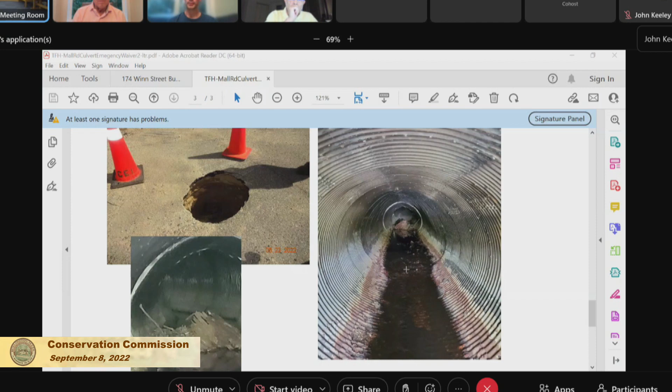What we'll have to do is bypass the Long Meadow Brook. Up until this point it was pretty dry, but with this last bit of rain we definitely have water flowing through it. The bypass is the same as what we're doing with the stream cleaning: we'll sandbag the stream and put a pump in it, then pump around that culvert. We were lucky that there's a catch basin right there, a 12-inch pipe that goes across Mall Road, parallel to the 84-inch pipe, so it discharges at the exact same location. If there's any sort of problem with sediment, we can use dirt bags, wattles, or hay bales to capture that sediment. So that's the game plan.

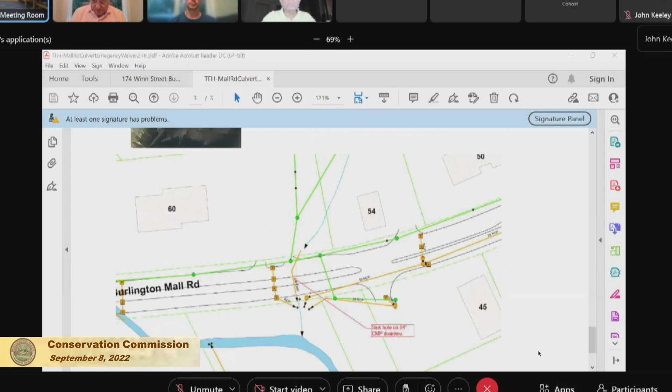All right, Eileen, or John, do you have any comments on this? So the only real concern is the dewatering.

Obviously they need to take care not to suck up a lot of sediment and discharge it into the stream. So I was thinking one of the things we could condition as part of this is that the catch basin they're pumping into be cleaned beforehand and after the project is done. Clean out the catch basin. I don't know, was there any other draft conditions that I put in?

That's just a suggestion, it's up to you, but.

No, you said catch basins and culverts used for bypassing stream flows shall be cleaned before and after culvert repair, and filter bags shall be used to filter stream flows prior to discharge to catch basins. So just the filter bags, is that the only condition you're proposing for this? Right, yes.

So there's no document in front of us? Well, there is, but I can share it. That's all right, I heard what - oh, it's an emergency certification, so it's just a couple conditions, no document. I can share it, but it's a very simple document. Let me just, yep, that's fine, and it's gonna pop up.

Those two things that are hard to read from over there are the two special conditions. So that's what the cert just looks like. Okay, good. Let's see if anyone has any comments.

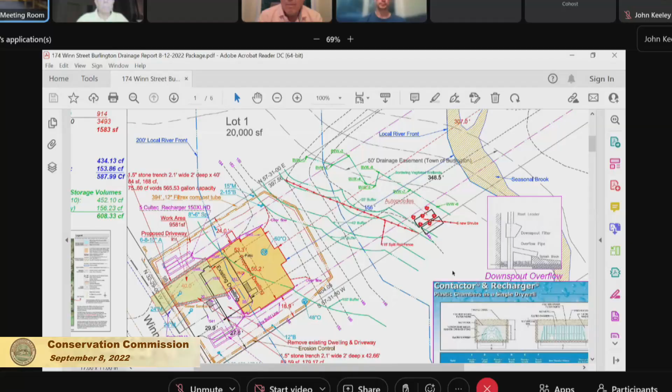Okay, let's go around and see if there's any last questions, and then we have some draft documents for a negative conditional determination. Let's go with Dawn.

Dawn, any further comment on this one? See this, Mary? I did, thank you. No further comment. All right, Indra. No, I'm happy that they were able to move the house towards the street, 10 feet. Right, that's good, exactly. All right, how about Ed? Nothing to add. All right, how about Kent? Bill, Nope, they addressed everything we asked. Much appreciated.

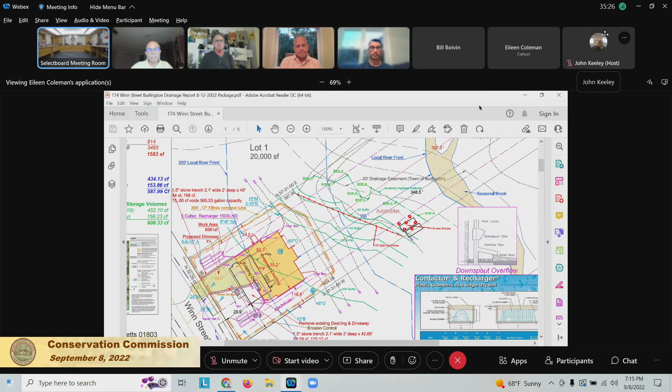I'm just wondering about something. In pulling the house 10 feet forward, that leaves some distance of flat area before that slope starts. Do you happen to know how much that area is, like when you step out the door, it's flat, and then some distance off it goes down the slope? No, I do not have an exact setback for that.

I do believe that Mr. Ferrante is proposing a walkout basement on this yard, which will accommodate some of that drop because you won't have foundation wall showing. That's fine, okay. I understand your concern about that, no, I was more wondering how much of a flat backyard he has before the slope, that's all. But it's not necessary to know that in order to approve this.

Yeah, I don't have an answer for that. The fact that he pulled it 10 feet, I'm more than happy with. Yeah, that also reduces the length of the driveway. I mean, there are several positive features when you make that move. Right, good, okay, thank you.

Is there anyone in the audience for 174 Winn Street? Anybody has a comment before we move forward on it? Okay, the record should show no one, no abutters or other citizens have a comment on it.

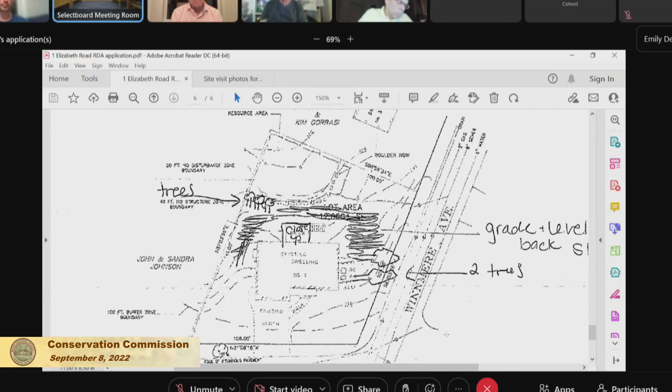So, Mr. Hamel, do you understand what our administrator is saying? So looking for a little more detail on what exactly we're proposing as far as the space that we are leveling and how much we're, I guess, bringing in to fill that space. Is that right? Yes. So the actual dimensions of the area...

...and showing where material is being removed and where material is being added. It's not clear if you're cutting into that slope or if you're bringing in fill. So all of that should go on some sort of a better sketch. Okay. Yeah, you had mentioned a retaining wall of some sort. That should be shown on the plan with some description of what it is and how tall it is, et cetera. Okay.

Okay, so, all right, let's see if any of the commissioners have other questions. How about Dawn? Anything on this one?

Nothing more than what was already discussed. Same thing, only one comment I have, just what John mentioned already. The tree which is in good shape, I don't think that should be removed. That's the only comment I have.

The only thing I was concerned about, after we left, I looked back at the property on the other side of the fence on the left side of the house, where those 3 trees are questionable to come out. If anything's to be leveled there, it'd be interesting to see the leveling. What does it do up against that fence? Or is that pretty much the same level on either side of the fence? I'm trying to wonder what the leveling would do. So what's being requested would probably answer that.

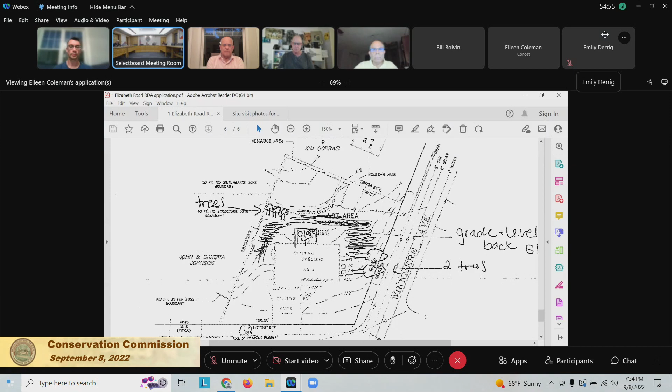Bill, have anything else? The only other thing was beyond the fence, there was some dumping, and some looked like maybe construction material, some panels or whatever. We certainly don't want dumping to encroach onto the regulated area at all, especially non-biologic material, construction material, stuff like that — should certainly get that removed.

Well, those piles, I think, are well within the buffer zone, right? I think so. I think they are. Buffer zone? Oh yeah, yeah, they were. Okay, yeah, the back porch is in the 40-foot no-build, I think, right? Okay.

All right, I have 2 questions, both for John, or Eileen. If the removal of the 3 trees on the left-hand side — is there anything about those trees, would the wetland, which is what we're trying to protect, have sufficient shade, or is it a non-issue if those trees are removed? No, there's a lot of trees on the other side of the fence between the fence and the wetland. Okay, so it's a non-issue for the protection of the wetlands.

Right, okay, that's good. And the other question I had — you said they're Norway maples, so those can be removed. Is there something about Norway maples, that they're not good or something? Right, they're on the state prohibited plant list. You can't buy Norway maples any longer. Why is that? They're very invasive, so they spread. Right, unintended spread. Right. Oh okay, well that explains why you made the comment the way you did, by non-native. Okay, all right.

Unfortunately, this site is rather narrow compared to what we've typically worked on. So we tweaked the design a little bit, and in doing so, we actually rotated the garage. We have a two-car garage so that it is on the rear of the building and has a side access from the driveway. You can see on the plan there that section that's sticking out in the back of the house. That rear of the garage is about 169 feet off the property line and about 184 feet to the edge of the brook.

So that's where we're actually violating the 200-foot setback. We've also, since this is a larger structure than the other houses in the neighborhood, and also desire to give a larger front lawn, we actually pushed the house back 20 feet from where the original structure is located. So that is another design decision we made for this house. On the left-hand side, we have the driveway and then a little bit of a turnaround area there. So that's kind of an overview of where we ended up with this one. So we're seeking relief to be in that 200-foot setback a bit.

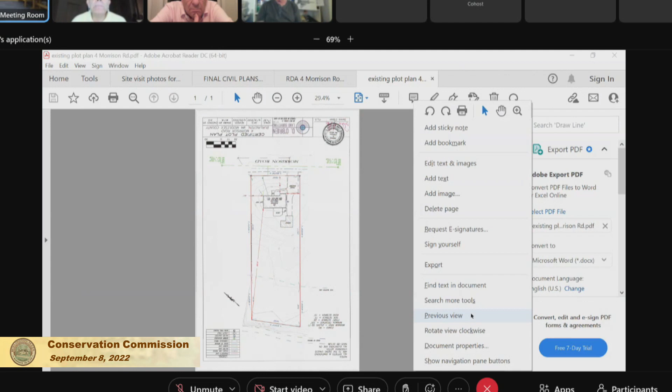Sure. Okay, good. Very good presentation. Thanks. Thank you. John or Eileen, would you like to give us a rundown of the resource area and any comments you have or concerns?

Okay, well, I guess it'll be me. So the confusion there was over versions of the drawings that I saw, because it wasn't clear at some points whether they were inside or outside the 200-foot buffer. So just to show you, this is the existing house as it is. There's a garage kind of far back, and the house is definitely more than 200 feet from the back of the lot, but the garage is a bit closer.

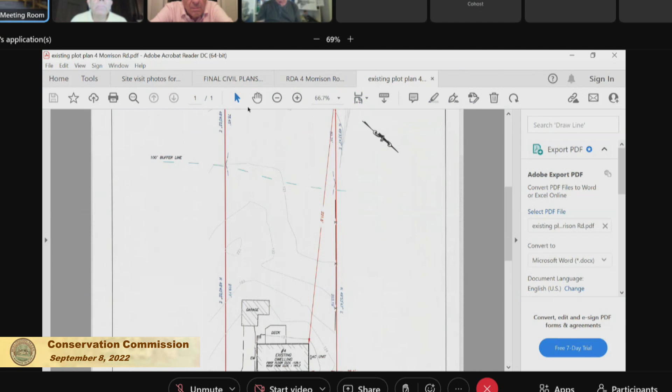Oh, sorry, I've just accidentally gone onto, give me 1 second. So now the back of the house, which I think is where the new garage is going to be, is 180 something feet from this brook. It's off their property. We did take a look yesterday. I didn't see any wetlands on the back of the site. So we are dealing entirely with

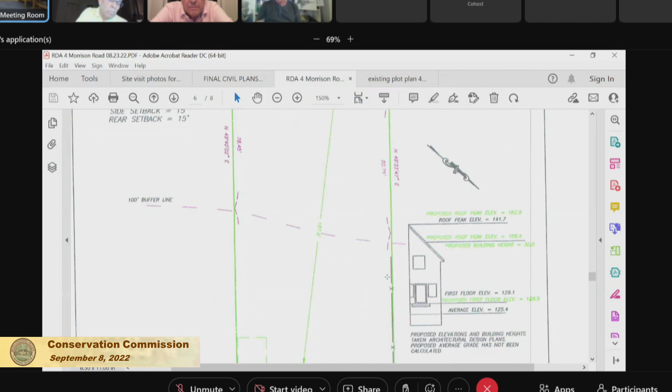riverfront under our bylaw. So there was a little bit more confusion as to whether, I don't think they understood that we usually, with a full tear down and rebuild, we do usually regulate that under the stormwater bylaw as well. So we ask that we know what it is that they're doing for stormwater, because otherwise it would go through us with a stormwater permit anyway.

So they had also produced these civil plans. Now, I don't think they wanted me to show it just because the distances are wrong, but this one, just so you know, shows how they were proposing - I'm not sure if this is final now because there was some confusion over this - but they were proposing to put in an infiltrator, which was going to take at least some of the runoff from the roof, and to put in a stone trench with a perforated pipe along the driveway, with the driveway pitched towards that pipe, so that all of the water would be infiltrated on site.

So there were just some questions today, some back and forth, as to whether it was over the 10,000 square feet and as to whether it's actually inside or outside the buffer zone. So that was the confusion. So it is riverfront.

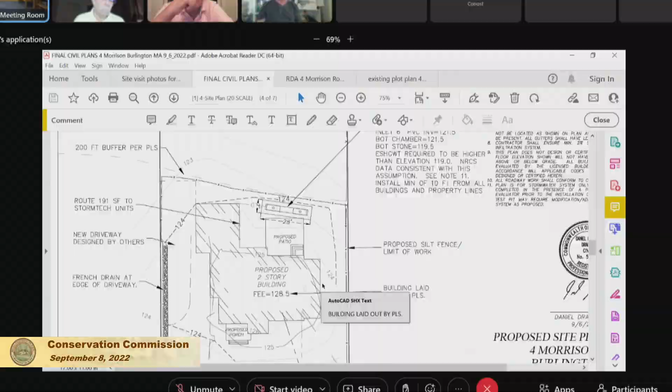So how many feet closer into the riverfront is this, to clarify for the commission? Closer than the existing? Well, it's actually pretty similar to the existing. I think it's maybe a few feet.

About 185 feet from the edge of the brook with the new house. As for the old structure, the back of the garage is right here. I don't know if we have an exact garage dimension - the red dimension would show the house, but maybe it's 10 feet or something. It's not a lot, but it brought them closer.

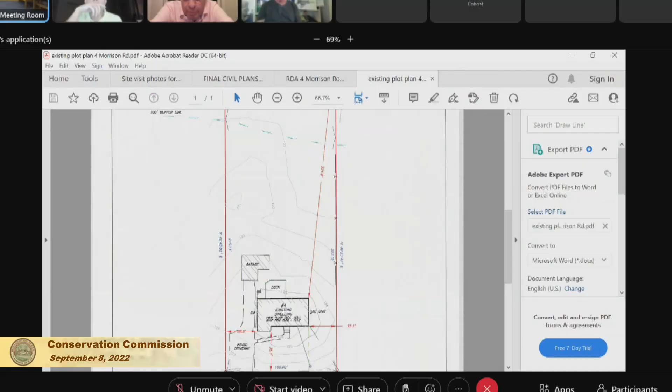We were considering 15, all the setbacks when we were designing this, so we were asking for a small release.

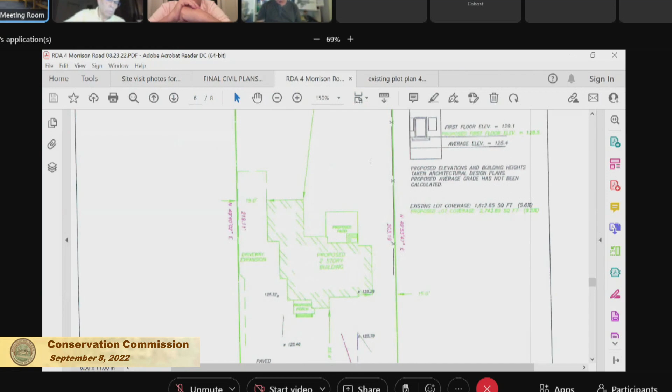Let's go to the commission and see if they have questions or just comments. Don? I don't have any further comments. Indra? No, I don't have anything at this point.

That's fine. How about Ed? Ed, are you muted by any chance? Sorry about that, I was trying to find something but it's not what I was thinking. So no, nothing to add.

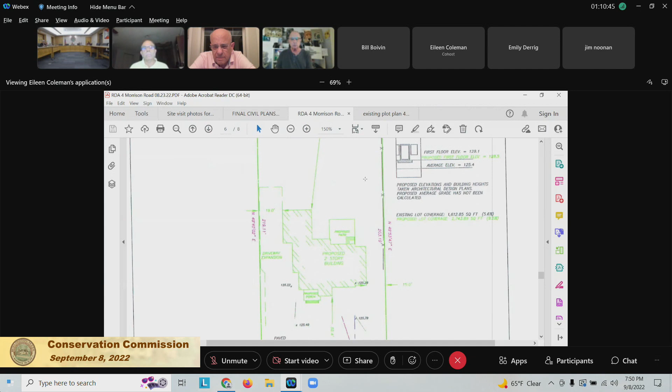All right, Kent? We do need the drainage specifics, not only the infiltration, but what's going into it and how you're handling driveway runoff. Is it pitching to a trench? We don't want the driveway running off into the street, so we're going to need that information for the next meeting.

Our intent is to meet the guidelines for the building, so we'll show that we have a civil engineer that will draw that up.

I don't believe it was required for this meeting, correct? Well, I did say it to you guys in an email yesterday, to be prepared to explain how the stormwater was going to be managed, because we do regulate it under - the civil drawings you have, that will be the same plan. The only difference was his dimension was off.

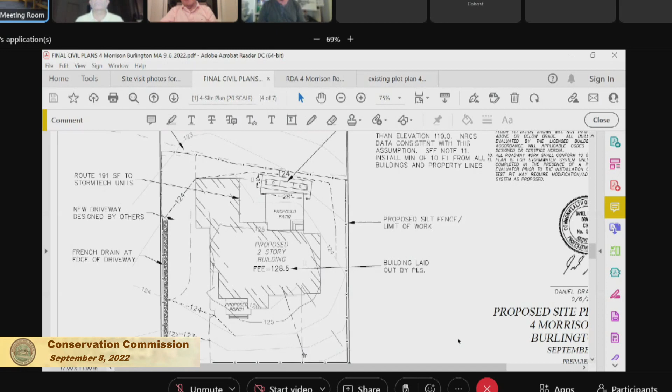So do we have a copy of that - French drain and a stone trench here. How is the runoff from the driveway being handled? Could one of you go over how the stormwater off the house and off the driveway is being handled? Now I see it, okay, I didn't see that drawing before - there's a grid. Go up there and point if you want.

You have the pump system, that's where all the gutter leaders would be pointed to collect the water, and this is for the driveway. The only thing we're pointing out, so maybe it's alarming you, is that the 200-foot setback drawn here is in the wrong location. Yeah, no, I got that, we understand. But the way you're handling the stormwater is exactly the same - correct, it has nothing to do with the setback.

Okay Bill, do you have more questions? I'll just clarify, what's going into the StormTech - is it the house and the garage runoff? You say garage, you mean the structure? Yeah, the roof.

It's actually only part of it, which is something I should have - what we're pointing out here too is the driveway runoff. In the drainage calcs that you sent, it looked like only part of the rooftop was going into the StormTech system, and I was wondering where the rest is going. It would be per the regulations that are required.

So where are you proposing to put - how are you proposing to infiltrate the water on site? Is it just going to be that some of it's going into the StormTech and some of it would go to grass?

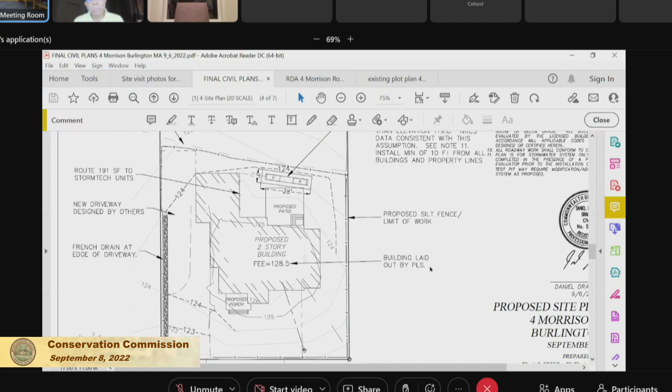So some of it is going onto the grass. I know what he's saying. The way it's actually written, we talk about it - it can't be any more post-development than it is pre-development. So they looked at the impervious surface before and after, and they're dealing with that. So as long as it's going into the grass and some of it's going into the StormTech, that's okay.

We're an experienced firm. My words can either be believed or not believed, but this is not the first project we're doing in Burlington. We're finishing up one on 5 Grandview, and I think you did a review of that. No, because you said you were under the 10,000 square feet. Okay, but we didn't do a review there. So-

What I'm getting at is that we wouldn't distribute the water onto somebody's yard or onto the street. That's very well known for anybody. So if the requirement is such that we need to increase the StormTech system to distribute more of the square footage of the roof, that is definitely going to be addressed, and if that needs to be put as a part of the condition, we're all for it.

Pretty typical. All right, so-

Eileen and John, would it be your recommendation that what we see here is how the stormwater is being routed? Is it enough to close, or what more do we need in order to close next time? Or are you okay with what we have? No, I'm okay with this as it stands.

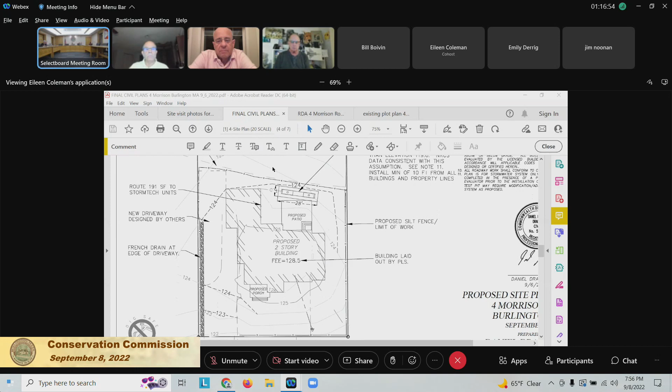No, I have no objection now that it was explained to me. I just wanted to make sure - your job as the designer, right? And our job is to make sure that you have. So I'm now satisfied, so thank you. All right, no one else? No, I don't have any problem either.

All right, is there anyone in the audience again for 4 Morrison Road? I don't remember if I asked for that, but...

Okay, so what we're going to do is we're going to review the documents and then carefully list any conditions to make sure we have all the little i's dotted. You guys have a copy of this? Yep, you have that. Okay, so we'll just go through it and that will be it.

Okay, I think I need to update the plan reference because we really just got stuff today. So I'm going to reference the civil plans because that's giving us the most information about the stormwater, okay? And the fact - I'll just update it to say it'll, okay? I just want to put that out.

The applicant proposed to demolish an existing garage that's within the riverfront area to a locally regulated stream, and to construct a new residence with attached garage and deck within the RFA. The existing house is outside the RFA. The new house will be approximately 185 feet from the stream.

Oh, we forgot to ask whether you're proposing to do any grading behind, like where your silt fence is now, or remove any trees - I mean, there's some shrubs there. Are you proposing to remove any trees? Okay, well, I'll just remove that part.

The proposed work was located within the outer 100 feet of the riverfront area of an unnamed brook. The brook is not perennial, but is jurisdictional under the Burlington Wetland Bylaw. The commission regulated the stormwater management of this project in this determination of applicability under Burlington's erosion and sedimentation control bylaw, rather than requiring a separate filing. So this just says that the commission is voting on this decision as described tonight.

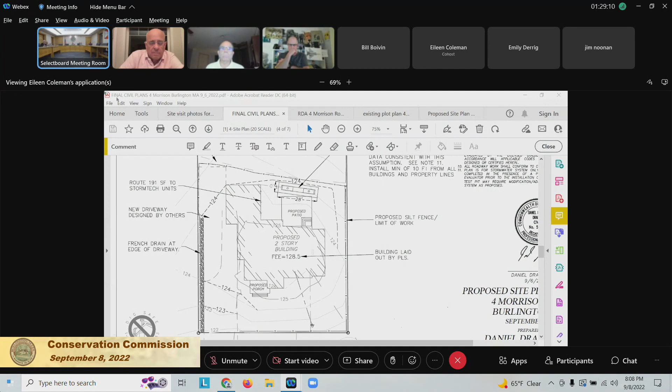Could I have a motion to issue a negative conditional determination for conditions as discussed for the property at 4 Morrison Ave under Burlington Bylaw Article 14 and the State Wetlands Protection Act? So moved, Bill. Second, Ed. All right, Don, how do you vote?

Yes. Indra? Yes. Ed? Yes. And Kent? Yes. And Bill? Yes. And the chair is yes. By a vote of six-zero, the negative conditional determination for the project at 4 Morrison Ave is approved.

Thank you. Thank you, Mr. Chair. Good luck with your project. Thanks, and many more. Thanks for answering all our questions. Appreciate it.

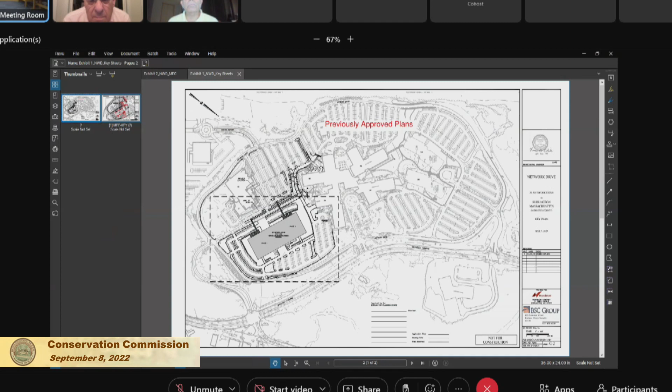For the driveway that goes up to 95 Network Drive, it's really just a realignment of that, along with some changes to the sidewalks, adding and subtracting parking spaces in different locations. And then some minor changes to the stormwater and utility infrastructure in terms of moving catch basins, just to go along with the new grading scheme there.

And then as you get down towards this intersection where it connects to 25 here, a lot of the changes for this part of the project have been ongoing for months - just design development, working with the tenants, working with Nordblom, to make minor site changes, changes to the building. For example, loading docks being moved, further design on the generator layout, that type of thing. So it's been ongoing months of small building changes, which we have here in front of you today.

And I'll go to our full minor engineering change plan set here. So this is basically an overall picture. The red line work you see is what's being proposed, and it's laid over the black line work, the bold black line work, which is the prior approved layout on site.

So this is 25 Network Drive. This is the building, kind of on the downhill side of this project. It does look like a lot of red, but a lot of it is, for example, there's a loading dock on the front side of the building and on the back that's been now changed. So there's two loading docks on the back, which affected all the utility locations, curb locations, that type of thing. The building got smaller on the right side here.

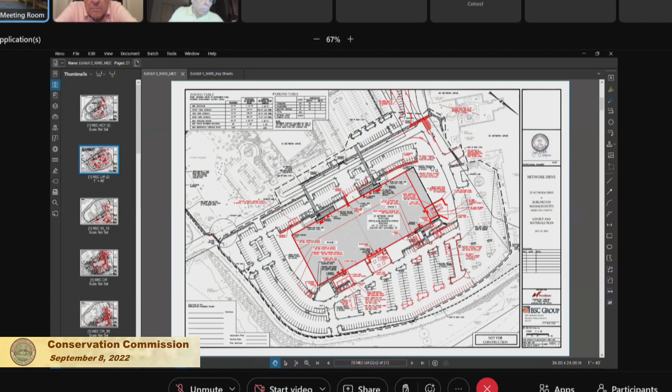And again, these are some of the more significant changes here. I can go into detail about more of the minor things, but I think it's probably better if you have questions, I can answer them. But I do just want to cover the intersection area that goes up to 95.

Which is in here. So again, the black line work was previously approved. There was this driveway that came up from 25 Network Drive and connected into the parking lot here by 95 Network Drive. The proposal was to shift that towards the site, which would still be going over existing parking lot area, and provide a sidewalk that comes in further away from the driveway. The intent is just to create safer travel for pedestrians and allow easier traffic flow for vehicles on the site. We did increase the radiuses here to allow for truck traffic to get down to the loading docks at 25 Network Drive.

I'll just keep going here.

So this is the grading plan. The grading scheme is largely unchanged. A lot of it is due to the loading docks being added in the back, elevation changes, the building shrinking over here, these contours being adjusted. Aside from moving catch basins and that type of thing, it's largely unchanged. Overall, we're actually reducing the approved impervious area for the overall site there.

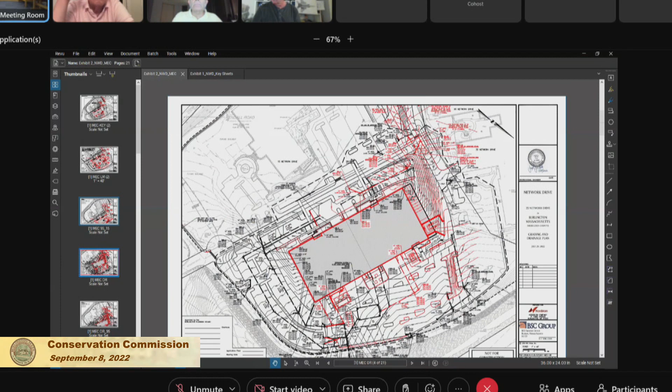Say, go back to here. So these islands in this parking lot were expanded to allow for sidewalks to come through closer to the building, kind of separate the driveway from the sidewalk over here. So there's additional green space created in there as well, which are kind of the big areas. And then just ongoing landscape changes around the building, that type of thing, throughout the design process for 25 Network Drive. All right, thank you.

John, do you have any concerns over this at all? No. Okay, let's go in reverse order. Bill? No, like you said, it's a lot of red, and at first glance you go, oh my God, but it really is a collection of minor changes. The fact that the building footprint is being reduced by 8,000 square feet, and that's going to become green space is a benefit to these changes, so I think it's fine.

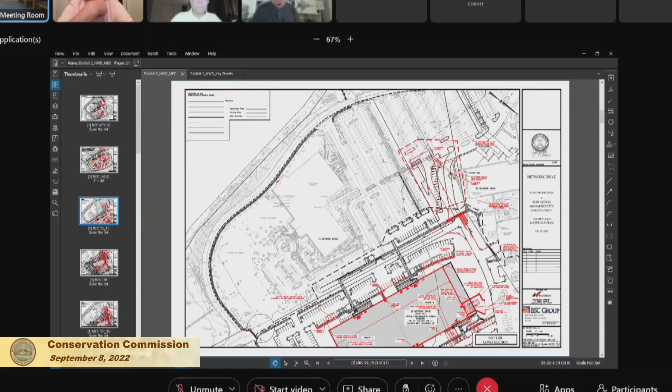All right, keep going. Kent? Just what Bill pointed out. All right, and then we'll go with Ed. You're muted, Ed. I did it again. Didn't really say anything to add. All right, okay, and next is Indra.

Yeah, just want to be sure, so there is no change in the drainage calculations, right? That's correct. The extent of the changes as far as stormwater goes, I think we might have added a couple of catch basins just due to the grading, to make sure we're capturing all the runoff into those couple of new catch basins, and the rest of it was moving ones that were already approved. Again, just to correspond with grading changes to make sure we weren't missing any areas. And since your impervious area is decreasing, so the calculation, whatever you had, should be good, right? Yes, yep, we're not increasing the peak flows off the site.

All right, thank you. Good, thank you, Indra. Next, Dawn, anything more? No, nothing else to add. All right, the chair has nothing to add either.

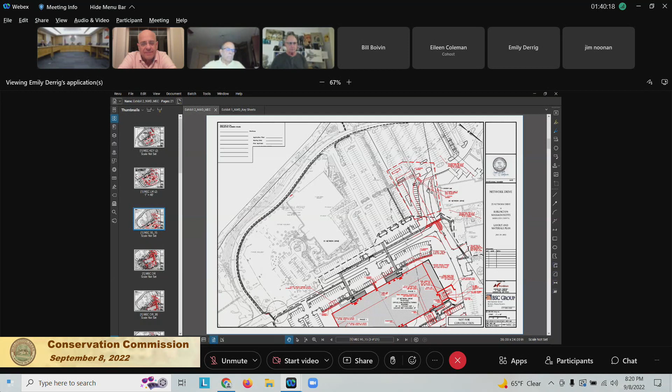So I guess the next thing to do would be to vote a minor engineering change. Could I have a motion to show agreement with the application for a minor engineering change for the property located at 25 Network Drive? So move. So moved, Indra, second. Okay, little competition there. All right, John, how do you vote? Yes. And Indra? Yes. And Ed? Yes. Okay, Kent? Yes. And Bill? Yes. And the chair votes yes. By a vote of 6-0-0, the minor engineering change with all the red on the drawing is approved.

So it's not on that plan we're sharing here? Let's see, it is on one of the plans. I had just put up the revised grading plan because that was most relevant to us, but I do have the whole plan set up here if we want to check where the borings were.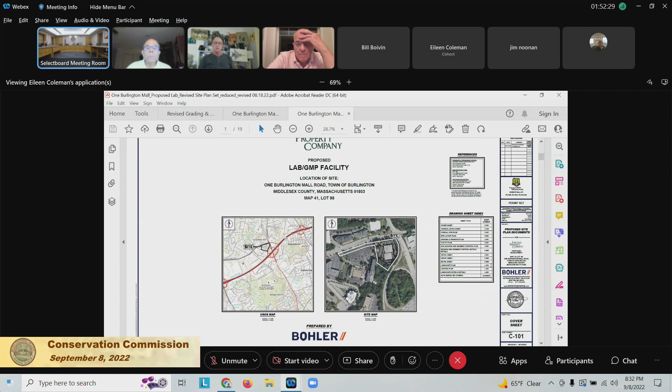They got the same place? Was the boring plan on the main plan set? Still in the exact same place, same size? It doesn't look any different. But it's draining through it. I know I saw them. Right, okay, thank you.

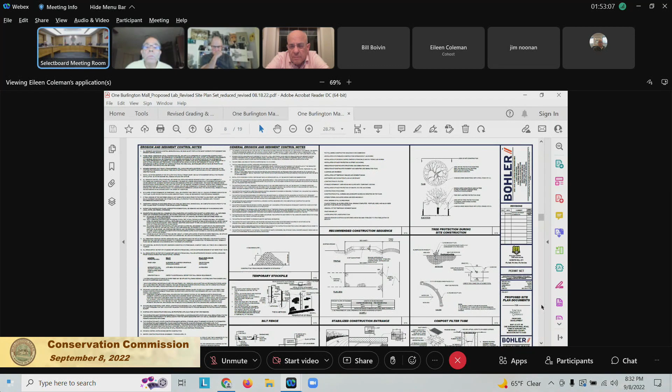Okay, so what are we doing, Eileen? The location of the borings. I don't see anything here, so the test pits were dug on August 9th this year. I'm asking the location - where did you take those test pits?

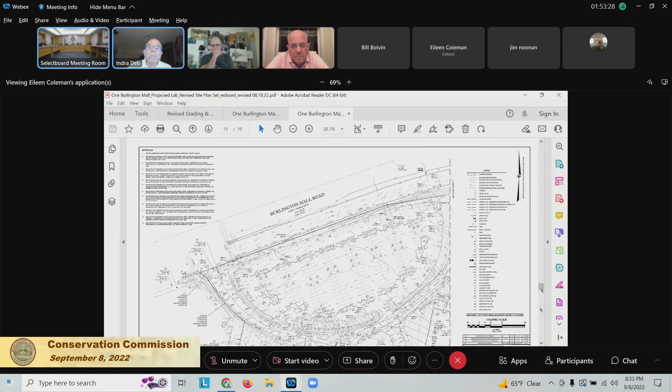There were three test pits done in the area of the rain garden and the infiltration systems. We also did testing at each of the proposed building corners. So there were nine total test pits, some borings and some test pits. Okay, thank you.

All right, I guess no one else has any question. I have one more question. Because you're going to be digging out the site quite a bit, are you stockpiling - have you designated a place for stockpiling of waste materials so that you can then cart them off? And is it far enough away from the wetlands?

There is, I believe, a standard condition in the order of conditions that will prohibit that from occurring within so many feet of the wetlands. We do have, on the erosion control plan, the northwest corner portion of the site outside the building footprint and outside of the buffer zone. It's well outside the buffer zone. Correct. Got it, okay good, thank you for that answer.

Okay, anything further? So is there anyone in the audience? This is a public hearing for 1 Burlington Mall Road, the lower parking lot for the Burlington Marriott, I guess, proposed by Lincoln Property. Was this your - sorry, where's my... okay, sorry, my mask.

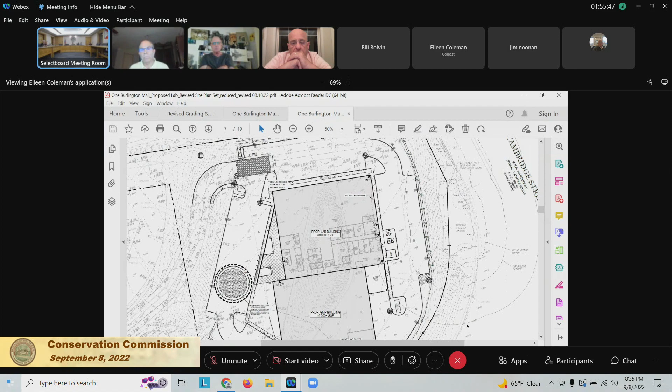Will they be hauling rock off, or are they going to grind rock to use it as a sub base? There's a fair amount of rock in the middle of that site - it comes up pretty high in the middle. I would imagine they're hauling it off, though I'm sure they'd like to use some on site mixed in with the new base, since as you get into demolition of the existing parking lot, probably not at the depth we're calling out on the design plans. It's a good opportunity to move some of that rock and enhance the pavement. They're gonna use blasting, I would imagine, yes.

We do not have a general contractor on board yet to come up with the actual construction plan, but there's a fair amount of rock there. I would anticipate some blasting, because the other alternative is to use one of those reciprocating jackhammer machines, and nobody's gonna want to stay in the Marriott day in and day out while that's banging away. That would take a lot of that too, to break up all that rock. They'd be at it for weeks doing that.

Eileen, you have draft documents, or John have draft documents? I do, but before we do, I wanted to reiterate what Steve had said about the phosphorus calculations they provided. The tool he's talking about is called a BATT tool, and it all works out. They're going to be reducing phosphorus by about 55%, I think it was. And it all made sense. I don't know if it was you or somebody else who explained to me where it was on the attachments, because I couldn't figure it out, but I think they provided everything you asked for. What's the requirement? It is 55%, but what's the requirement? The requirement is 50 for redevelopment, and this is mostly redevelopment but partially new, so I felt it was fine, right in the middle. Anyway, they did alter the infiltration sites and moved them to take advantage of the best locations, and we're fine with that too.

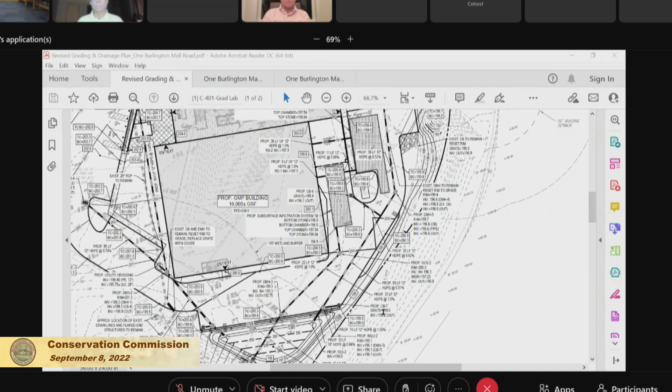Have you had a chance to review the draft? I did. Okay, so you want to do a review? Sure, can do. I hadn't actually opened that yet because we're moving swiftly along. Okay, I'll start with... oh, it's not there. Give me one second because I didn't put the... oh, I missed it. Decision. Yeah, I'll start with the bylaw. I'm sorry, it's not sharing. I didn't stop sharing and start sharing again. Start sharing again. There, here we are, take two.

As the project description: the proposed project is the construction of a new approximately 35,600 square foot footprint commercial building with associated surface parking, landscaping, utilities, and stormwater management systems. We went through the filing history and a whole lot of plans, some of which were just revised recently.

To account for the various questions that the commission asked at the last meeting, the project involves work that will occur within the 100-foot buffer zone to bordering vegetated wetlands. Then we describe the stormwater management under existing site conditions. The stormwater management system provides minimal treatment of runoff. Runoff from the adjacent Marriott property goes untreated to one of the wetland areas, and this will not be altered. The proposed redevelopment will result in a decrease of approximately 8,600 square feet of impervious area, and the runoff from the 84,000 square feet that will be redeveloped will pass through deep sump-hooded catch basins and two proprietary water treatment units prior to discharging to a bioretention area at the southern extent of the property. The runoff from the 35,000 square feet of rooftop -- did I make that number correct? -- will discharge to two low-profile subsurface infiltration systems. The applicant has calculated the amount of phosphorus that would be removed, and that equals about 56%, which complies with the Burlington Stormwater Bylaw.